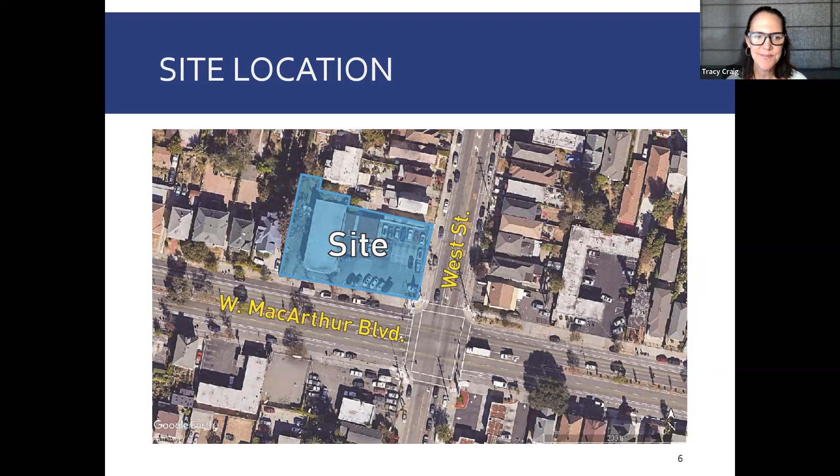Just a quick site overview. Important to note that 820 West MacArthur owns the site and will be redeveloping it. That site has been entitled by the City of Oakland. They're going to be building housing here, designed for what's called the missing middle—people that provide services, like teachers, nurses, firefighters, police, and so on.

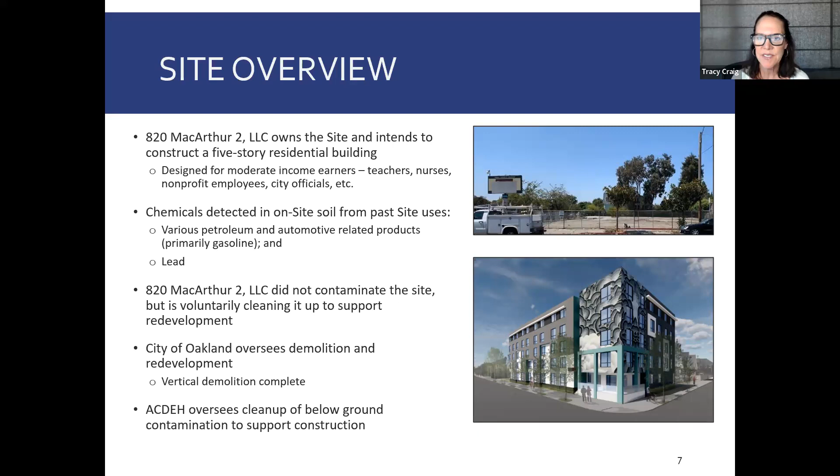There have been chemicals detected in the site, and Dilan will be discussing those later and what Alameda County's plans are to address those chemicals, so the site is safe for future users and people in the area. The City of Oakland oversees demolition and redevelopment, while Alameda County Department of Environmental Health oversees below-ground contamination cleanup to support construction.

And now I'm going to turn this over to Dilan Roe. Good evening, I'm Dilan Roe, Chief of the Land and Water Protection Division.

I want to give an overview of the history of the site. It operated as a gas station and a car repair and tire shop from 1967 to 2018. There have been quite a few environmental investigations conducted at the site over a period of 5 years, from 2018 to 2023, to understand the extent of impacts to soil, soil gas, and groundwater from releases of hazardous materials related to those historic operations as a gas station.

On-site environmental investigation findings have included the following: there is petroleum products in soil and soil gas, there are solvents in soil gas, there's lead in shallow soil, and there's minimal impacts to groundwater—very, very minor, but none that exceed any kind of risk-based level of concern.

Off-site environmental investigations have also been conducted on some adjacent properties, and the same contaminants—the same volatiles and petroleum contaminants—have been detected in soil gas on adjacent properties. The proposed remedial action, which we'll talk about in a few slides, will reduce that potential contribution to those offsite impacts, and post-remediation sampling will be conducted on those properties if access is provided by the adjacent property owners.

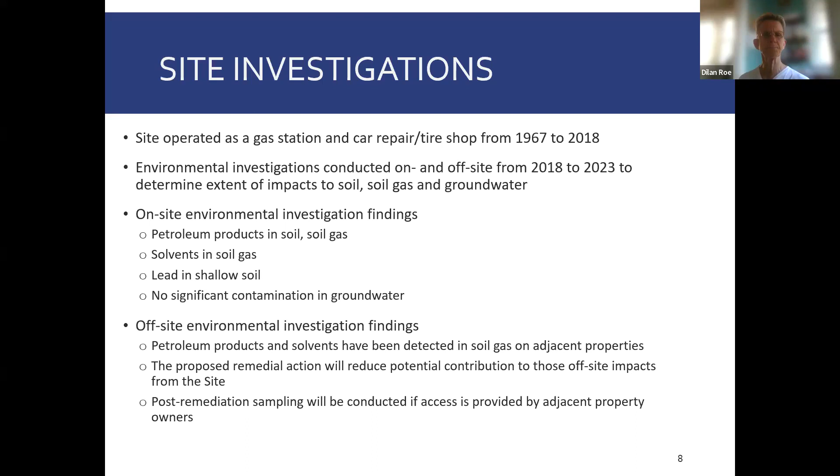This is a figure of the site. It's kind of hard to see, but there's a big arrow pointing from right to left, which is the direction of groundwater flow, determined by installation of 3 monitoring wells on the site—shown as 3 blue dots. This figure also shows soil vapor or soil gas wells, probes installed both on-site and off-site on the adjacent parcels, which are the points where groundwater and soil vapor data collection has occurred.

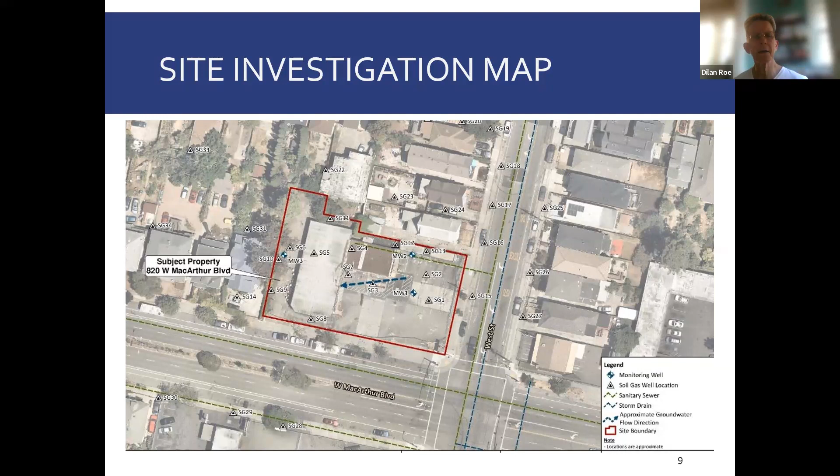This map is not a comprehensive figure of all the borings, but it has a lot of dots on it—these are locations where soil samples have been collected recently, to refine the understanding of the excavation extents that are going to occur at the site, and to characterize the soil for disposal at a landfill.

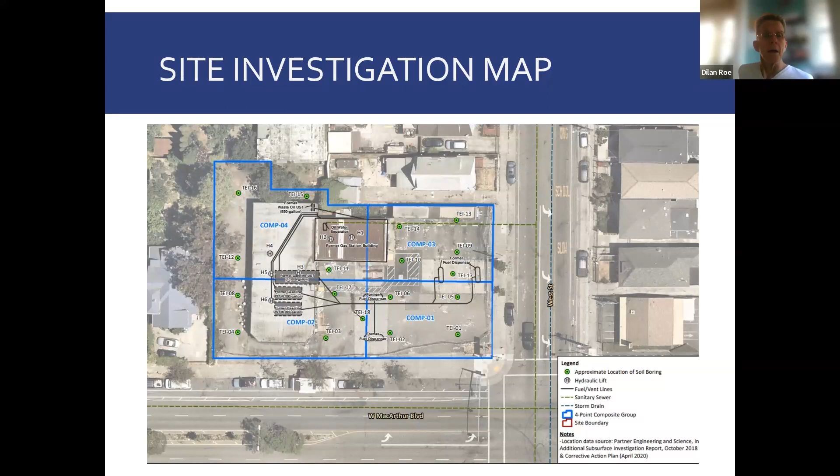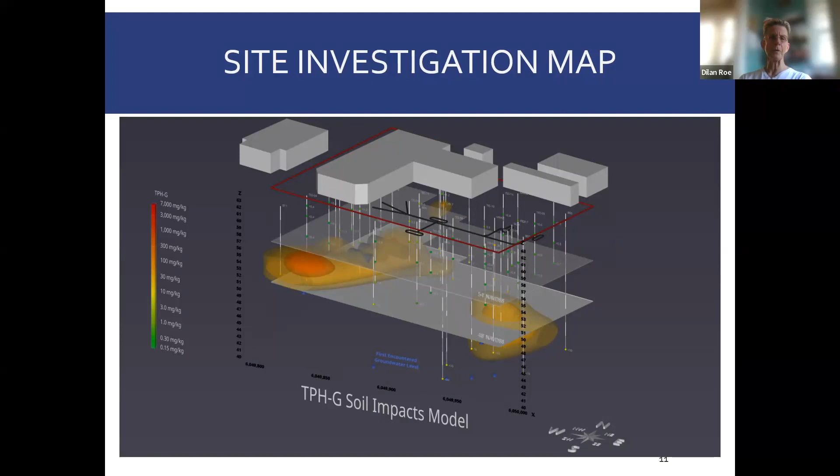This is a model that takes all the soil data collected at the site and puts it into 3 dimensions, showing where the impacted petroleum-related contaminants are. The brighter orange areas are the higher concentrations, and the lighter colors are concentrations that decrease as you move away from those hotspots. The remedial excavation will be focused on removing these impacts from soil.

Besides petroleum-related contamination, there's also something called tetrachloroethylene that has been detected in soil vapor both on and off-site. Soil vapor is air that basically collects in the spaces in soil beneath the ground. PCE is a contaminant of concern to us, and the suspected source of the PCE on site is from a drain area.

It's a little difficult to see, but it's at the top of the site, and you can look in reports on GeoTracker in the case files if you really want to see this better. There's a drain that also had a sanitary sewer running from it, and it does appear to be the source of the VOC, the chlorinated solvents, on this site.

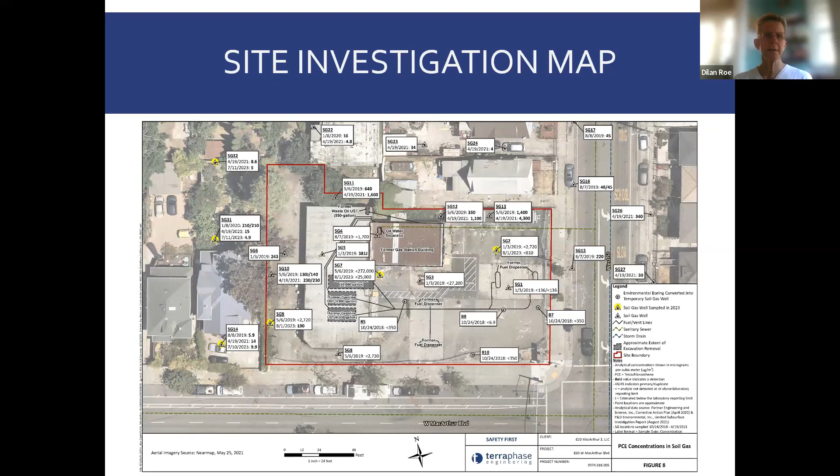So there was an original cleanup plan that Environmental Health approved in September 2020 after a 30-day public comment period was held on that plan. And that plan included excavation of the upper 1 to 2 feet of soil across the site to remove shallow lead impacts in soil, excavation of soil at depths of up to 5 to 10 feet in select areas to remove petroleum products. You can remember that 3D model that showed where some of that petroleum was, and then disposal of petroleum impacted soil at a licensed landfill off-site, and consolidation of lead impacted soil beneath the buildings, and backfill of excavated areas with clean fill, and then installation of a vapor intrusion barrier to help mitigate vapor intrusion risk, human health risk to occupants of the new building from vapors that may remain in the subsoil after excavation is completed. And then confirmation sampling - after the excavation happens, collection of samples to confirm that the remedial excavation was conducted in accordance with the plan we approved to remove the VOC impacted soil. Next slide, please.

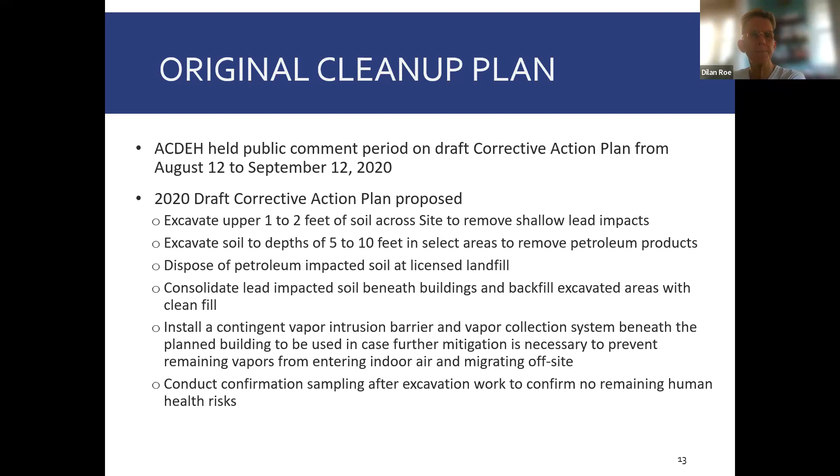After that 30-day public comment period in 2020, the case went silent for a few years, and during that time the developer worked with the city of Oakland to make some changes to the configuration, the design, and the building type.

Since the development project was re-entitled by the city, that prompted submittal of something called a 2023 Supplemental Remedial Action Plan, which modifies the corrective action plan that was sent out for public comment in 2020. The biggest differences are that the supplemental plan provides site-specific remedial goals based on the depth of contamination that will reduce exposure. So if you remember, in the previous plan, lead was to be consolidated on site. This plan now removes all lead that poses a human health risk - it removes it and transports it to an offsite landfill.

So the differences are that the entire site now will be excavated down to 7 feet, and select areas will be further excavated to a depth of 14 feet. The goal of this will be to completely remove lead-affected soil from the site to below residential human health standards, and to remove significantly more of the TPH gas and related constituents from gasoline from the soil.

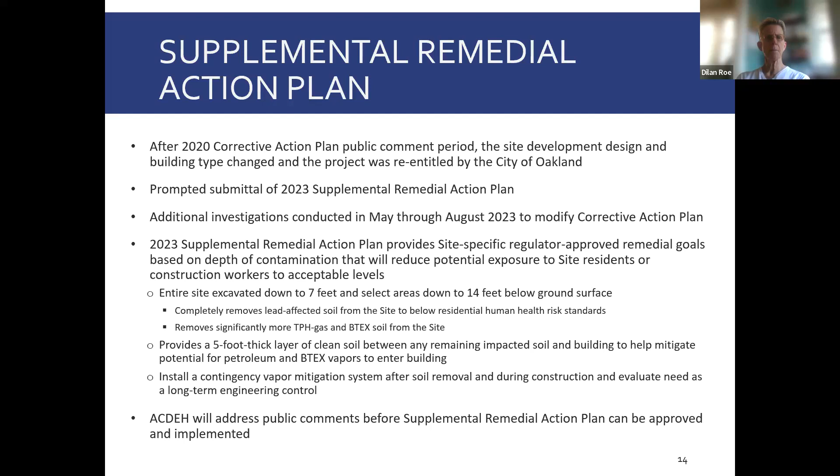So we talked about this. The proposed excavation will be to a depth of 7 feet across the site, and then there will be some additional excavation in the areas of the historic petroleum UST underground storage tanks that were the source of the release of the petroleum.

During the excavation, groundwater is likely to be encountered and will be removed and containerized and disposed of offsite at licensed landfills. And then all the material brought back into the site to backfill the excavations will be certified as clean material to ensure that we don't bring contaminated soil back onto the site. Next slide.

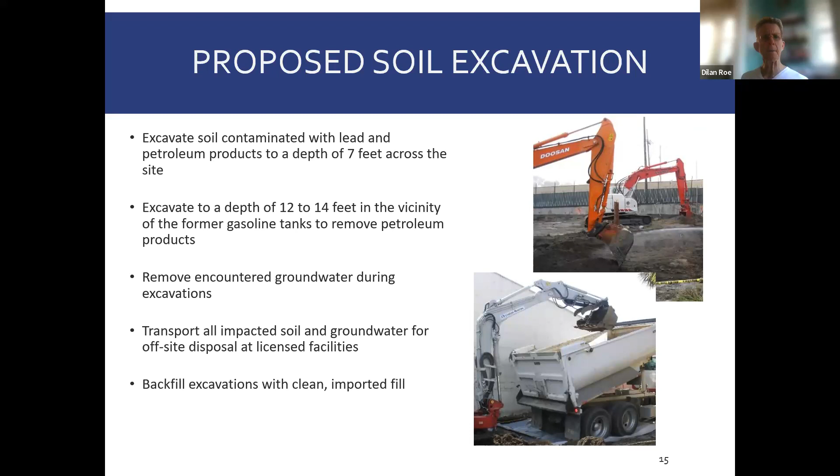So the excavation is going to be conducted in phases, and I'm going to tell you that this excavation is going to create odors. If it doesn't, I will eat my words, but it is a pretty big excavation to remove petroleum impacted soil, and it's a good thing. We want to get the petroleum impacted soil out of this neighborhood, but it means that for a period of 6 to 8 weeks, there are going to be times when there are odors. The phasing of the excavations is one way of helping to minimize that, completing some excavations and backfilling them before exposing the next piece of soil. So the entire petroleum impacted soil area will not be excavated at one time, and that's one method of minimizing odor. We'll talk about some other methods as we go on.

Briefly touched on this. This is really for the occupants of the new building, although vapor mitigation systems do provide some protection against offsite migration of any volatile compounds in soil vapor coming up through the soil. In this particular case, there will be a plastic barrier and piping underneath the building foundation, and the piping collects vapors from a gravel layer and vents them to the roof. There will also be some clay plugs that we put in new utility trenches, and the goal of that is to help prevent any onsite leftover contamination in soil vapor from migrating offsite.

As I said before, whether these vapor mitigation controls will be required to be monitored and reported on for the life of the project will depend on soil vapor data collected after the excavation to determine how effective the remediation has been. I expect, and the developer and consultants expect, the soil vapor concentrations to be dramatically reduced by this excavation.

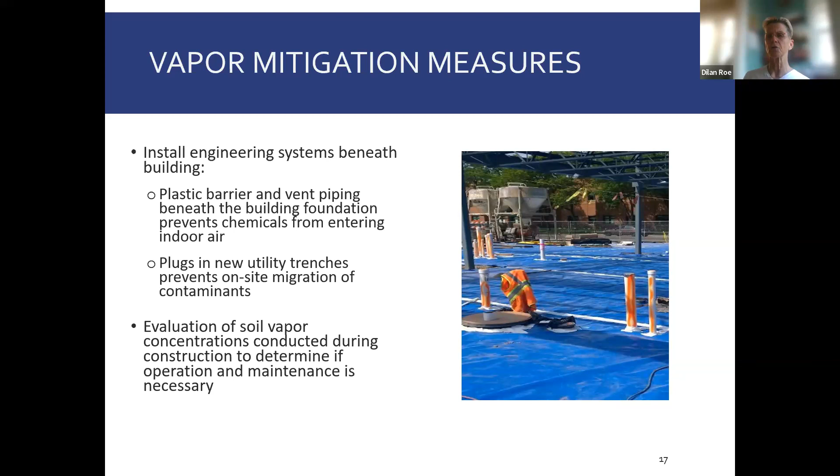Next slide. So during excavation, there's going to be a community air monitoring plan. This is for the community. There is a plan on GeoTracker. Is there a plan on GeoTracker, or is there going to be a plan, guys? Andy? It's currently not on GeoTracker, but it will be. Okay, so there will be a community air monitoring plan.

We're going to talk about what that is, but basically there are going to be some monitoring stations on every side property line on the fences, and they will be monitoring for particulate matter, for dust, and also for volatile organic compounds. The goal of these monitors is to continuously monitor and evaluate trigger levels to stop work when there are exceedances of volatiles or particulate matter crossing property lines, and that is to protect the community.

There will be air monitoring conducted prior to the work starting, and then it will be continuous through all excavation work. The health protection levels identified for this site are conservative, meaning they have a lot of factors of safety, meaning we want to make sure the community is protected during excavation. There are a lot of trigger points, and they will be specified in this community air monitoring plan, stating what levels will shut work down. Next slide.

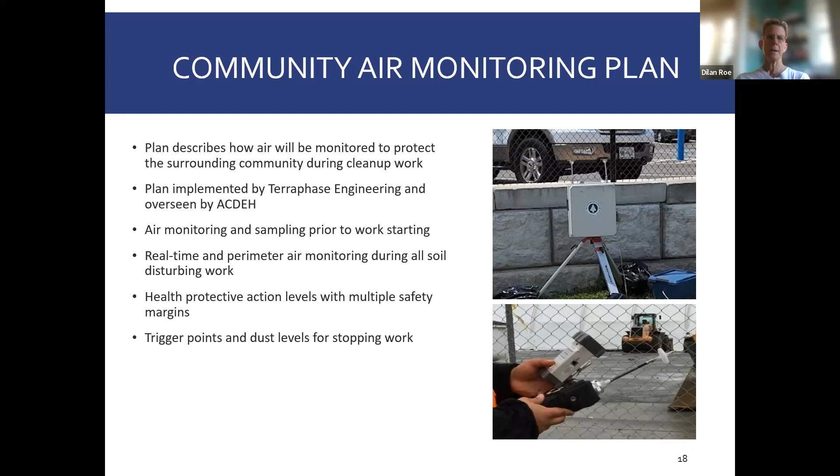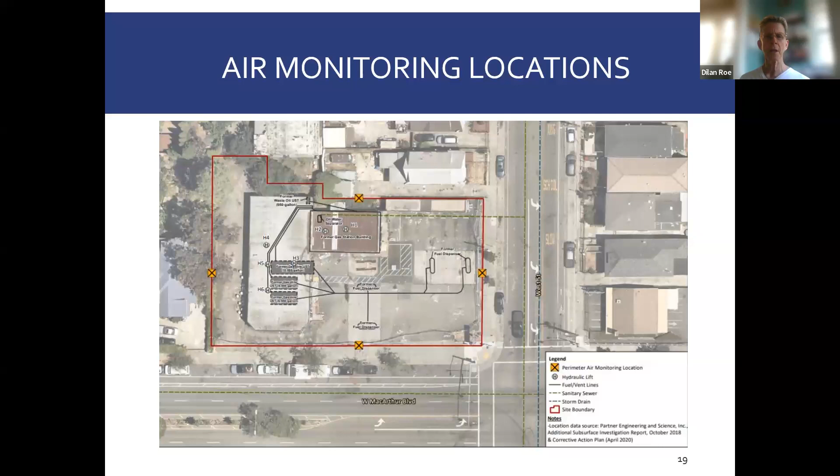We recognize that this is an area with residential uses and we have neighbors very close by, so there are lots of things we'll be doing to protect people's health as we do this work. First of all, in terms of managing soil, our best friend will be water. We want to keep that soil damp simply because that will tamp down some of those odors.

Also, soil will be directly loaded onto trucks. The advantage of that is that rather than having large soil stockpiles on site, you'll be putting that soil directly into the truck bed while keeping it moist. If you see the picture here, they're spraying water on it, which will eliminate dust and also storing soil on site.

We expect that you'll probably smell some heavy petroleum odors during some of that work. So first and foremost, if you smell odors, you can call me directly on my cell phone 24/7 - my number is later in this presentation, but I'll give it to you right now: 510-334-4866. I'll have a direct line to Seth, and we can quickly increase our odor suppression methods.

You will be smelling some short-term odors - we call them nuisance odors because they don't present a health impact, but they are bothersome. During that work, if you smell odors, the best thing you can do is close your windows. You can also call me. We're happy to give you a HEPA filter, which will help filter some of those odors out of your home so you can use your home comfortably during the excavation work.

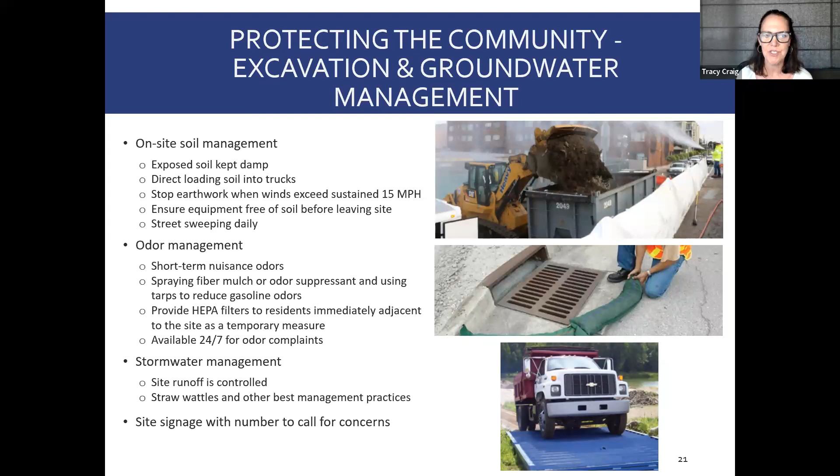Next slide, John. We recognize we also have trucks associated with this project, so just want to be clear that trucks will be staged off-site, so they won't be idling in the area and they won't be parking on the streets. We recognize it's residential and parking is tight.

The trucks are always covered and cleaned before they leave - we'll cover the truck bed and then clean the undercarriage and the wheels. Again, we'll be sweeping the streets, and we regularly monitor our trucks and make sure the drivers are licensed and know exactly what they're doing to make sure they're safe drivers.

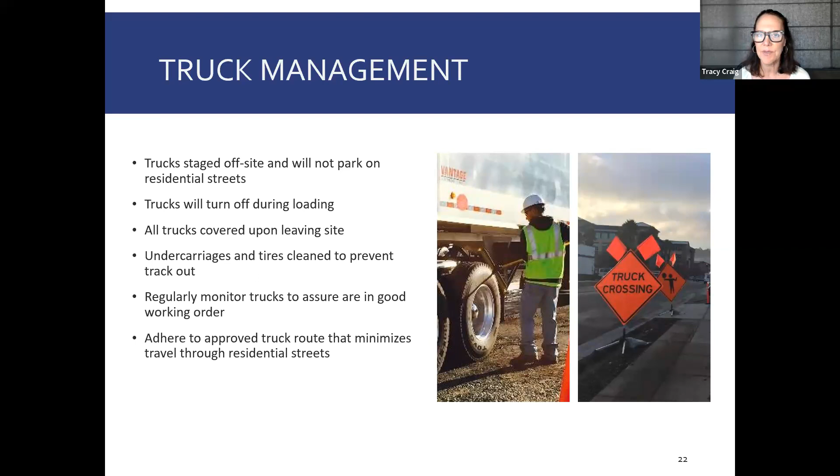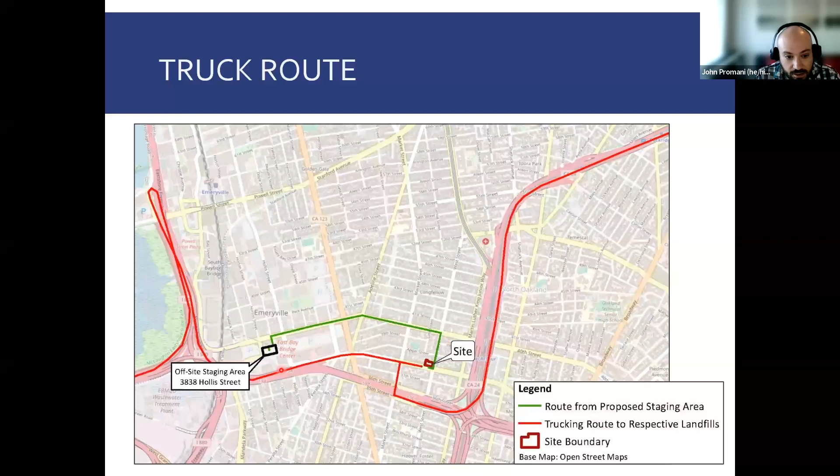Finally, we have a truck route, I think on our next slide. The City of Oakland makes us adhere to a truck route, and this is the route we're taking. John, I can't see that, so maybe you can tell us what exactly that truck route is here. Yeah, so the green arrow shows the route from the offsite staging area to the site, and the red line is the route trucks will be taking either to 80 or on 24 to go to the disposal facilities.

Okay, and then communication. First line of communications is me, you can call my cell phone. We'll have a sign with site contact information, including my cell phone number and the number for the Bay Area Air Quality Management District, should you choose to call them. I will probably respond faster, so I'd encourage you to call us both. We'll also distribute a work notice prior to work starting, mailed and walked around the neighborhood to make sure people get it.

Again, that notice will have my number on it, and if you want any kind of help or an air purifier, please let me know. We'll have regular reports about the project, including air quality monitoring results, uploaded to GeoTracker. That GeoTracker link is on the work notice, and it will also be shown in the next slide.